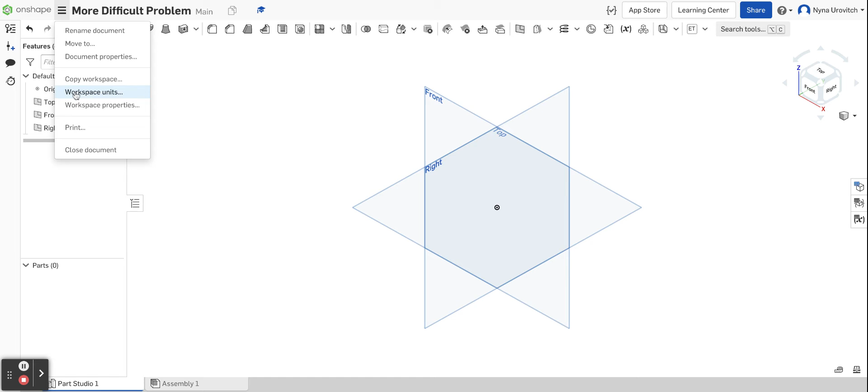So the first thing we're going to do is switch to millimeters. Right next to More Difficult Problem, it says workspace units, and mine is already in millimeters. You might have to change yours.

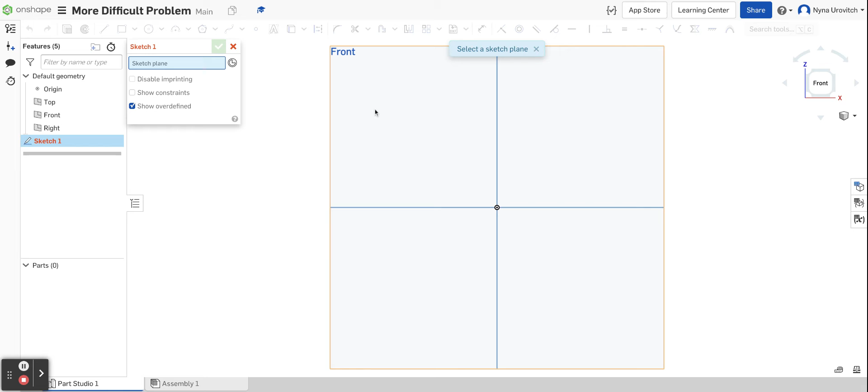The next thing we're going to do, I want to remind you that we have to go through the origin. So we're going to go to the front view, that's where we're going to create our sketch. We're going to create a sketch, and I have to select the plane I want to sketch on, and of course it's going to be front view. I'm going to do this whole thing with line draw.

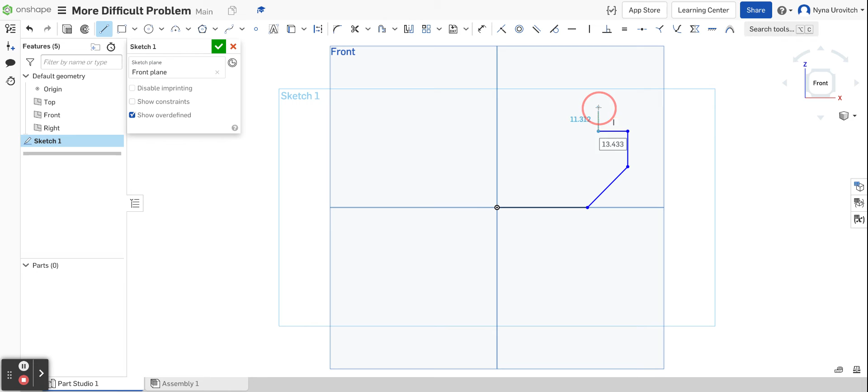So I'm going to get my line over here, and I'm going to go to the origin because I need to make sure that I pass through the origin, and I tend to forget. I'm going to just go do the general shape. It does not matter how yours looks really, but you want to get all the angles in, and this is the general outline.

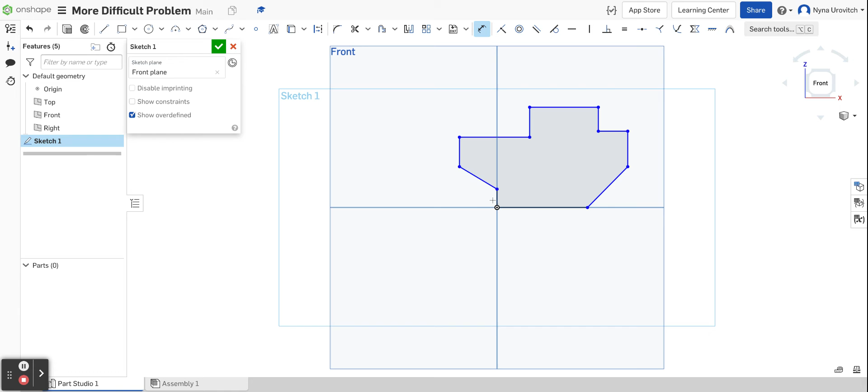Now I'm going to go around dimensioning it. So we're still in sketch mode. I'm now going to select the dimension button, it's a D right over here, and I'm going to begin. I think I'll begin over here. You could start wherever you want, and it's 18.34.

Okay, I'm next going to go 44. Next, I'm going to go 18. Next, I'm going to go 30. And the next step is 50. So they skipped one of the measurements because it's clear that it is 50 subtracting 30.

So in order to do that measurement, we're going to highlight this side and then this side, and that will give us a measurement of 50. So I'm still in the dimension mode, I always check. I'm selecting it, and then I'm selecting this one over here, and I could tell I want it between those sides. And I'm going to write 50.

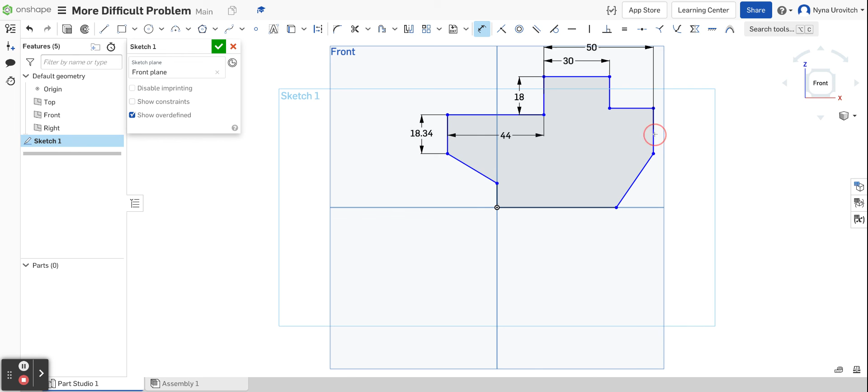This is 20. This is 42. This is 46.

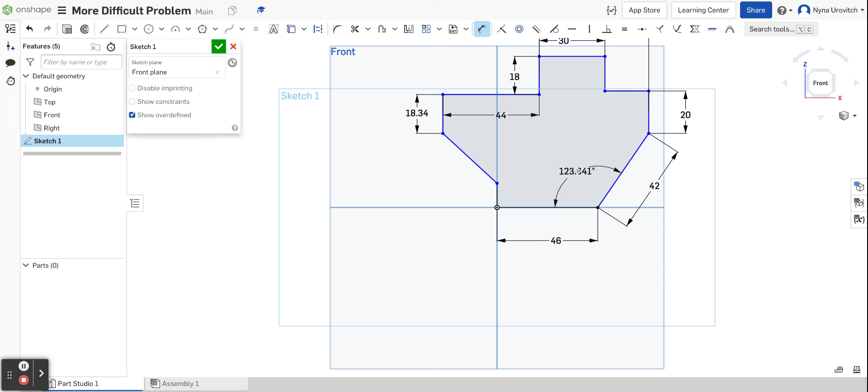Okay, and there's an angle in between, so let's figure out how to get the angle. You want to highlight this line and then that line. So let's do the highlight, 1, 2, and I could see that we're looking for an angle, and we're going to write 144, and that changes the total shape. And this height over here is 9.78.

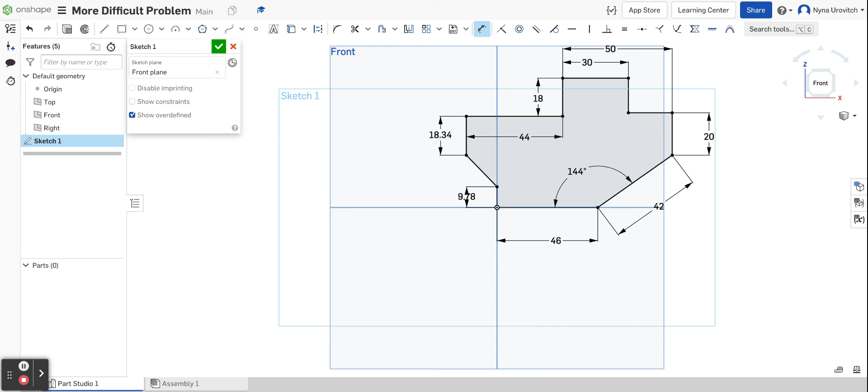And if you have all those and there's no conflicts, it is correct. Let's take a look at it at the isometric view. First, let me check out, and we go isometric view, and there we have some type of a weird shape.